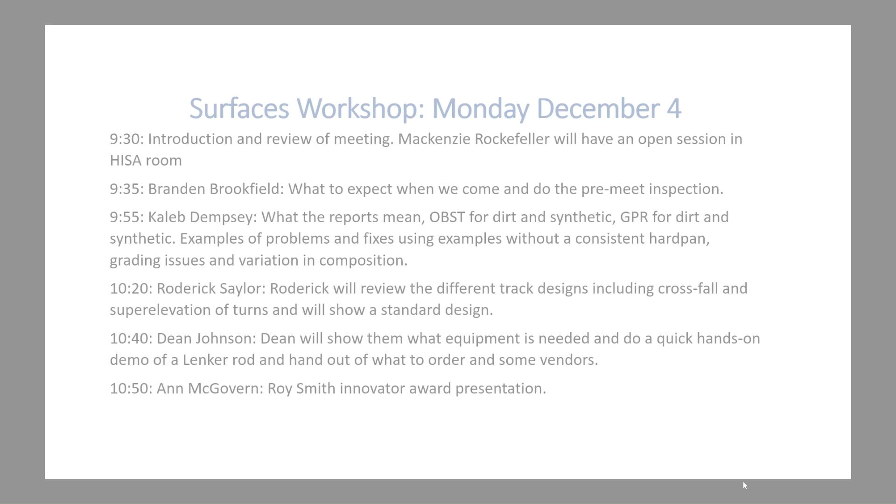Morning, everyone. As Mick said, my name is Branden Brookfield. I am the Onsite Testing Manager with Racing Surfaces Testing Laboratory. And today I am really going to go through what on-site testing includes and what that is going to look like when I show up on your racetrack.

So starting out, why does our on-site testing look like it does? A lot of what we have been doing, especially this last year, is pre-meet inspections. We are showing up, as Mick said, 2 to 4 weeks before your race meet starts, and we are going through and trying to fulfill each of these. So we are going to be looking at geometry of your track. We're going to be taking grades, looking at the slopes. We're going to be trying to figure out the accuracy of the distances. We can GPS mark your poles. We're looking at cushion and base geometries. We're taking those measurements at every 8th pole as we go around.

We're doing a base inspection. We are using ground penetrating radar to do that, where you are not having to take a large windrow out of your track to get down to your base and inspect it. We're looking at the mechanical properties of your racetrack using the Orono Biomechanical Surface Tester. The surface materials, we're going to collect some samples, take it back to the lab, and you'll get a report on that as well. And then we are also trying to fulfill these 2 bottom mandates here, the rail inspection and the track design records.

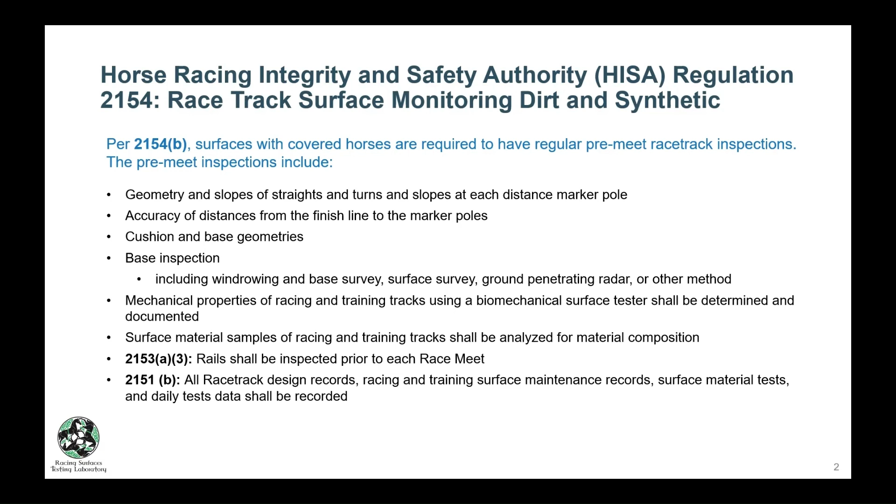And so this is all for the dirt and synthetic. For the turf, it's just slightly different. Mostly looking at the turf profile and turf species. We also want to take some samples there. And so then how are we fulfilling these requirements? As I said, we're using the Orono Biomechanical Surface Tester to look at the different properties of your racetrack, how it responds. That machine is going to be replicating the leading forelimb of a horse at a gallop. And so it is a standardized way for us to test across many different racetracks.

Again, the ground penetrating radar, where we can look into the layers of your track and not have to do anything really heavily invasive. The rail inspection, we're going around, we're walking the surfaces, making sure that everything's at a relatively standard height and that we don't have anything like we see here where there's gaps. And then we're doing the surface cross-falling grades as well as checking the marker poles, as you can see there in the far right.

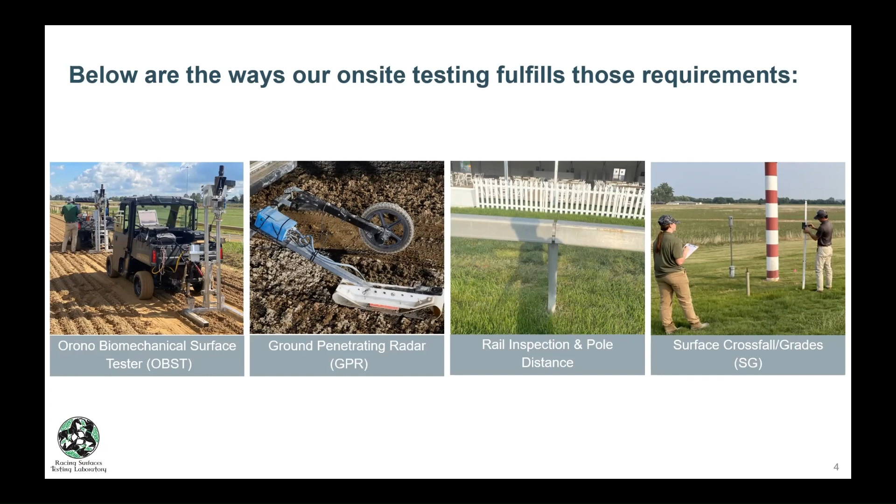So first things first, when we make it to your track, what do we need? We need a race-ready surface on your dirt or synthetic. And so what is a race-ready surface? A race-ready surface for us is going to be prepared as it would be for your first post. We don't want any changes. We want to make sure that you've really got all the hoof prints out if you've had morning training, and that everything is as set up and as perfect as it can possibly be. The biomechanical tester, we call it the OBST. It is fairly sensitive to changes. We're looking at variations of a 1/4 inch and seeing disparities with that. And so we really want to make sure everything's set up as best it can.

Also, we would really appreciate that we don't have a change in daily routine. If you change the depth on your harrows, you change the speed at which you're driving, you can start to create problems, which makes it not as accurate a representation of your track as you would probably like. And then we also need it to be classified as good. We can't test a sloppy surface. I don't think you guys would want us to test on your sloppy surface. It's just not going to give any good data.

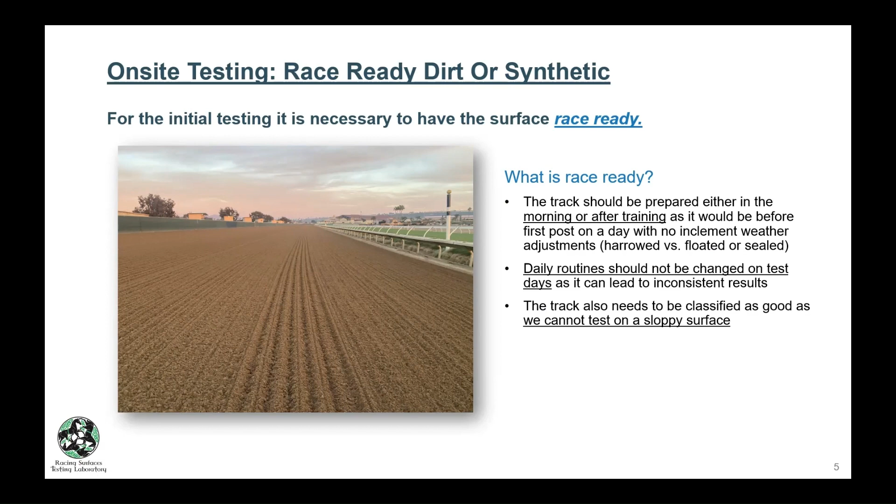And so to start out, we usually begin with the OBST. We are doing 3 drops at each 8th pole in the 7-foot and 15-foot lanes of your racetrack. You can kind of see that here - your blue is going to be your 7-foot drops, your white is going to be your 15-foot drops. It's 2 laps, and that'll take us roughly an hour to get done.

So why are we testing at these locations? It's going to accurately represent your racetrack for what most of your horses are going over - racing lanes. We want to be down there closer to the rail, and that's really what we're concerned about, when your horses are up at speed. Testing at 7 and 15 really makes sure we cover that. If you've got larger field sizes, 10, 12 horses running, you're obviously going to be out just a little bit farther than that 7-foot location. The 3 drops at each location really just allow us to look at variation both there at the pole and then variation over the entire track.

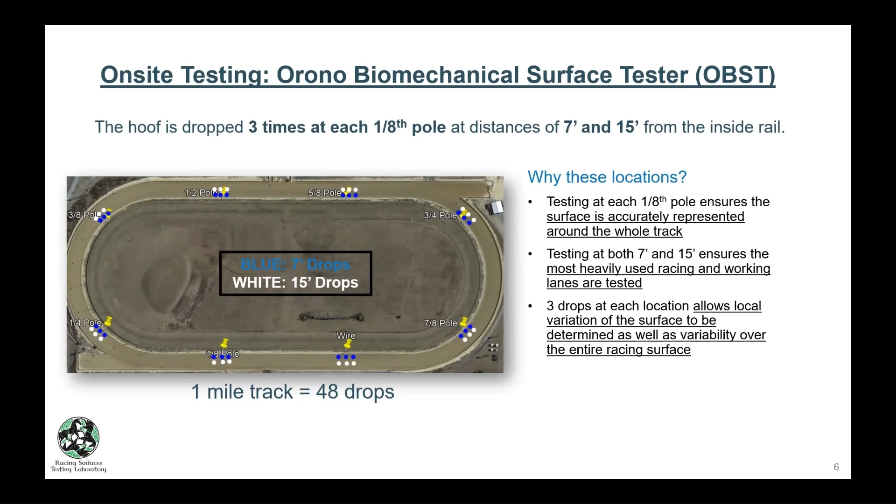So what information is our OBST producing? You're going to get 3 different measurements in your on-site testing report. You're going to have your cushioning, which is your vertical load. You're going to have your impact firmness, which is the deceleration, that's going to come to you in a G-force. And then you're going to have slide, which is your horizontal. All 3 of those will let you see how your poles stack up against other points locally and then across the racetrack.

And then for turf, we are actually going to use the penetrometer, which is a little different than the OBST, but a very similar concept of looking at the penetration depth.

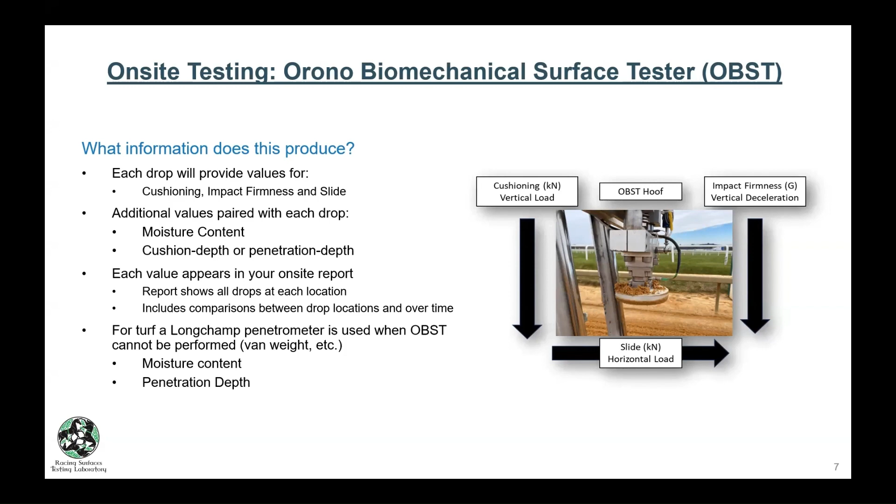So the next thing we're typically going to do is go to the ground penetrating radar, once we've finished with the hoof tester. For that, we'd prefer the surface be sealed in some capacity, whether it's with a roller or you float it down - it just makes that antenna bounce a little less. That's going to be the white piece there. The less that bounces, the better it's going to make your track look.

This is going to be able to see down - we can see your cushion layer, a pad layer, hard pan if you've got it, and we can see your base layers. And we can do all that without having to really disturb the surface, but having that nice, smooth ground to go over certainly helps us get that image better.

The best part we like about this is it allows us to take an extremely large amount of data in a relatively short amount of time. From us dialing it in to being done takes roughly an hour per surface, and we're taking a measurement every 4 inches around your racetrack as we drive, doing a total of 4 laps. That's obviously quite a bit of data points - a lot more than you could do taking hand measurements out there, and it's much more efficient.

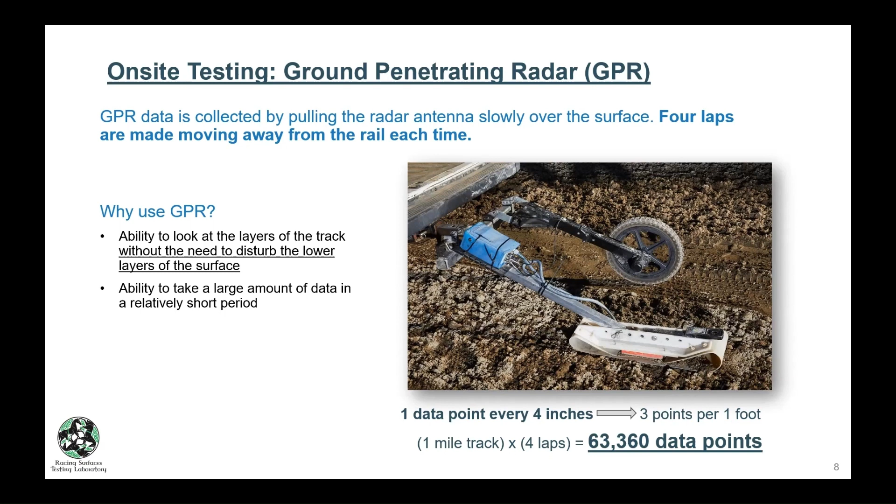So we're going through and looking at these layers, trying to see anomalies. If we see anomalies and things in there, we can notify you guys, and we actually have it with GPS data, so we can tell you exactly where on your racetrack that is. It's not a guessing game, it's not just 'okay, it's roughly at the 8th pole' - we can tell you fairly specifically where that's going to be on your racetrack.

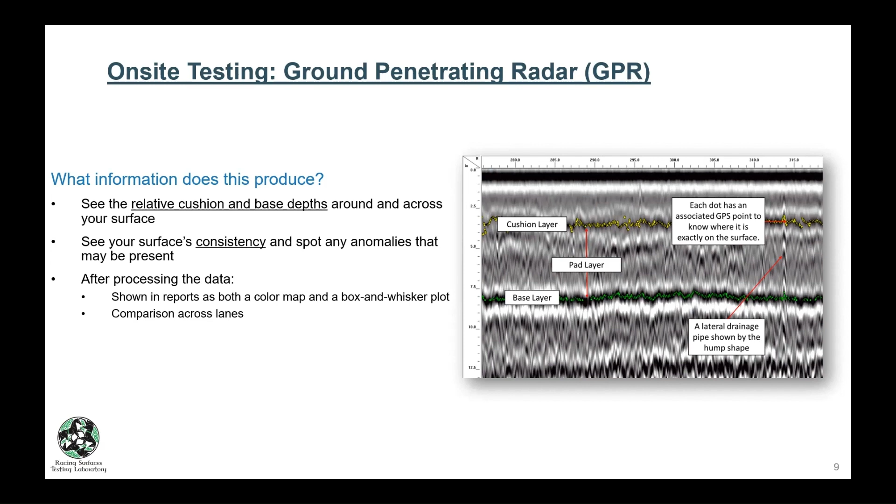So after we get done with that, this is the part where I like to say that you guys can really have your racetrack back. Normal maintenance can resume. I can dodge you and make sure I'm out of your way. I understand, I worked on crews at Keeneland, so I understand you guys have a lot to get done. In roughly 2.5 hours of testing, you guys can resume your normal maintenance and really get back at it. As you guys resume, I'm going to be taking grades.

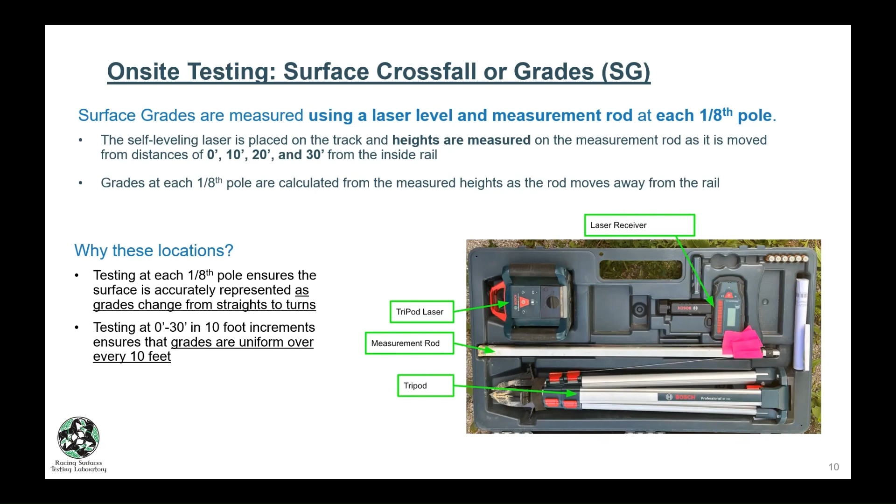We're going to check it at 0, 10, 20, and 30 so that we can see your grades as we go across the inside racing lanes. This is what you're going to get when we are all said and done. You'll have a very similar picture to that in your report. It allows us to determine your average slopes, look at standard deviations, and make sure that you're consistent around your surfaces. Obviously, that's our goal right now: consistency.

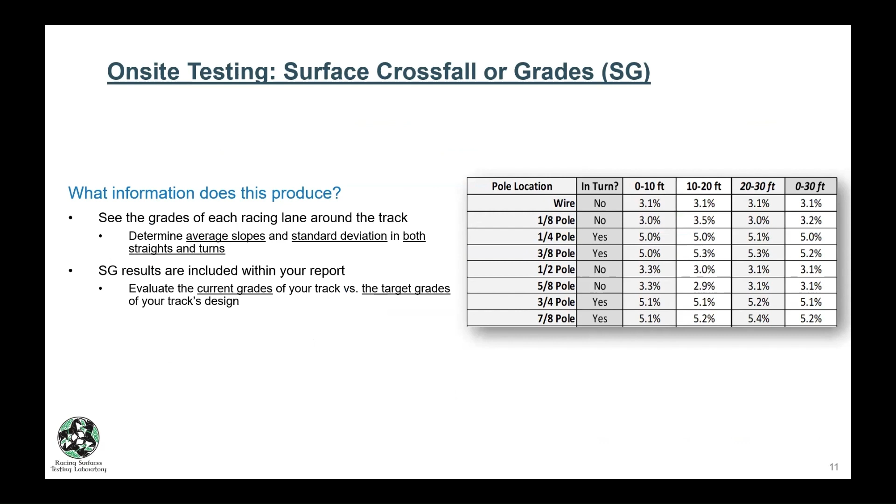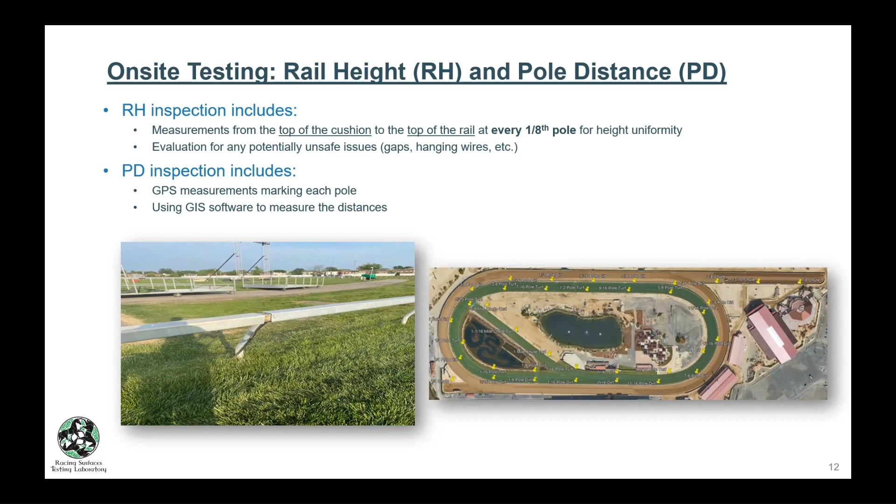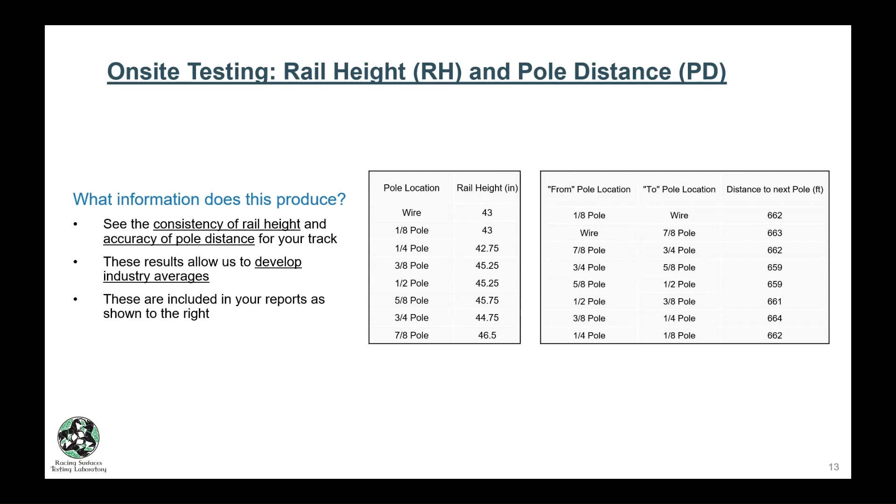After we get done with the grades, we're also taking samples as we're on site. Depending on your track, that's going to be dependent on how we take samples. For dirt, we are taking 7 standard samples for anything over a mile during on-site testing. If you are a training track, we're just generally hitting your quarter poles, generally a little bit smaller. You can get a much more accurate representation with fewer samples, just because of the smaller surface.

Synthetic, we're also doing quarter poles at 7. And then the turf, we're doing quarter poles at 3 and 28, as the rail tends to move for most properties.

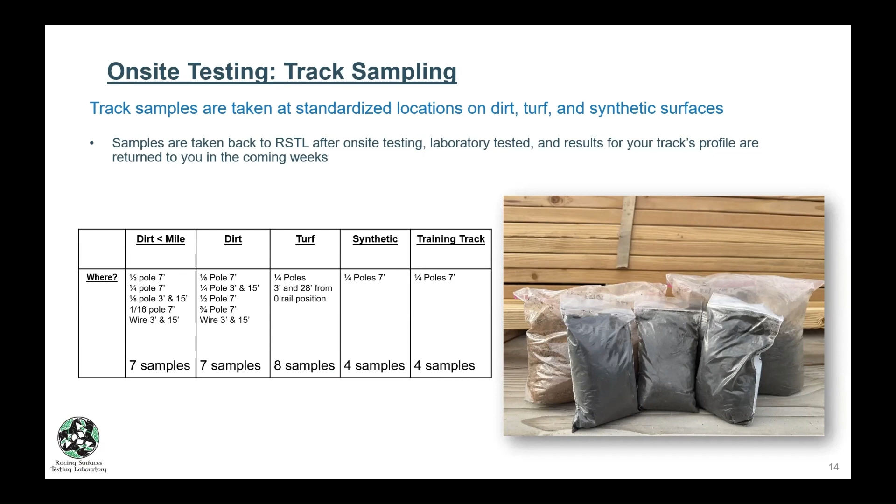So how are those results going to come back to you? That is going to be a report separate from on-site testing. When I make it back from my trips out to the lab, I'm handing those off to other people within our organization, Pat and Andrew, and they are looking at the sand, silt, and clay percentages of your racetrack and of that sample. The different samples that we take allow us to compare across your entire surface. If you have spots that are different or areas that are more affected by erosion, we're able to see those differences and then advise on how you guys can help them.

As I said, a huge factor affecting that is going to be drainage of your racetrack. If you've got large drains in an area or a place that continually likes to run off, most of the time that area is going to come back slightly different when we run the tests.

And these results are going to be provided in a composition report. That's going to be set out separate from the on-site testing report, but shouldn't be too long after we were on site.

The final thing that I'm going to do while I'm out there is check your weather stations if you guys have got one on your property. Really don't need anything from you all on that, and generally it's not on the track, so I'll be completely off your surface at that point. I'm going to be checking your rain gauges, making sure everything's on, and making sure you guys are receiving data so you can make decisions when you come in the morning. If we want to cut the track open, you can open it, see how much rain you got in the night past, and make that educated decision from that point.

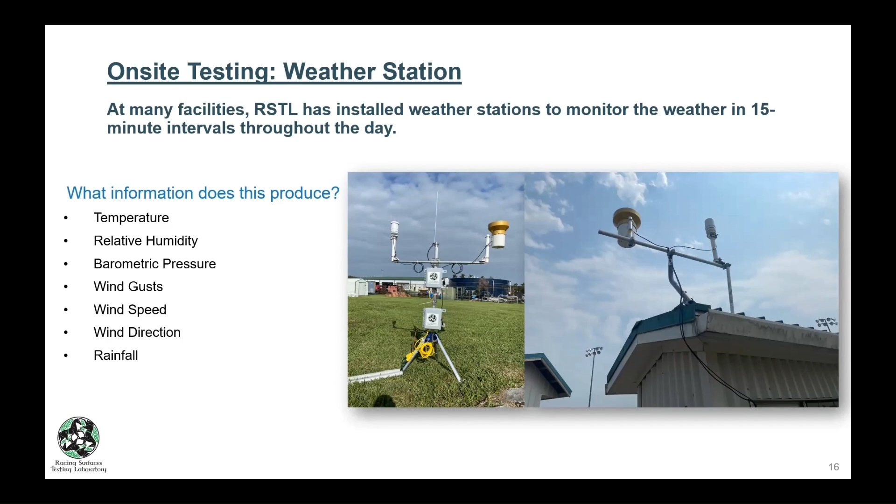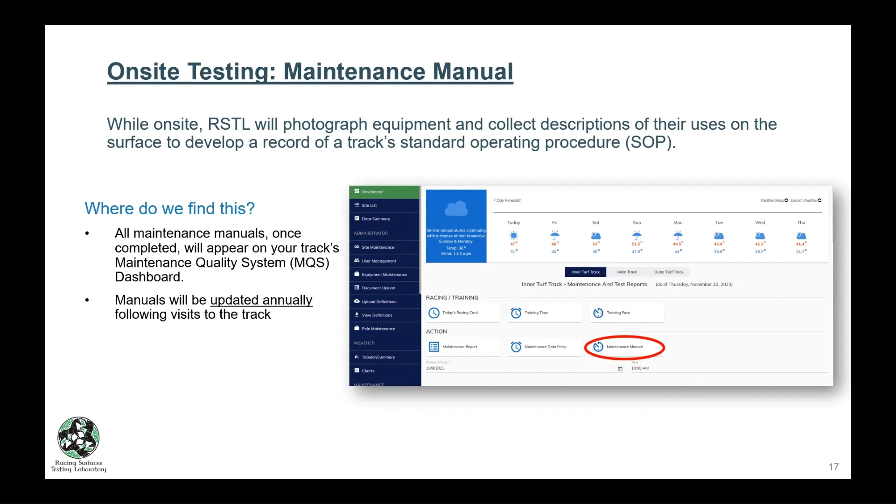Okay, the next thing I'm going to do is the maintenance manual. This is something I do when I get back to the lab. It's kind of a development of a standard operating procedure for your racetrack. The biggest thing we see is knowing where to find it, and this is just a snippet of the MQS page once you've logged in. As you can see, it's going to be right here on your homepage for maintenance manual. Once we have that completed, it will just appear here. It's not going to be sent out formally to you.

So then what kinds of things are we putting in your maintenance manual? Well, we're trying to figure out how you are taking care of your racetrack. So we want to know the equipment, the depths, the speeds, how you're running it, certain patterns. If you have a way you run your breaks, or a way you open the racetrack every day, those are all really helpful things for us to note.

And then you can see here at the top, this is what your maintenance manual is going to look like. It's going to have your equipment and what it is, how many you have, anything specific to your setup. The more information we can get, the more information we're going to provide back, as far as what you're doing daily with that equipment.

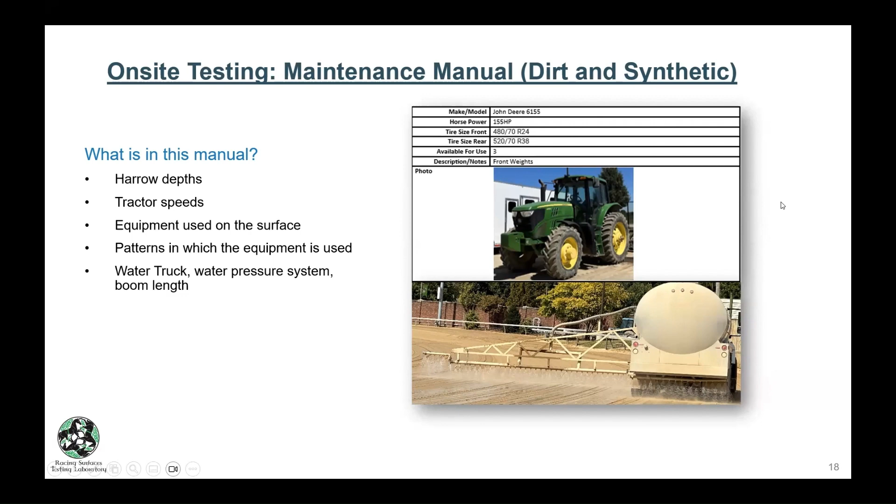We do this also for the turf. It will be included. For the turf, we're wanting to see if you have anything specific, as far as a turf tractor, aerators, vertidrain. If you have a specific spreader that you like to top dress with, those are all things that we want to include in your turf report.

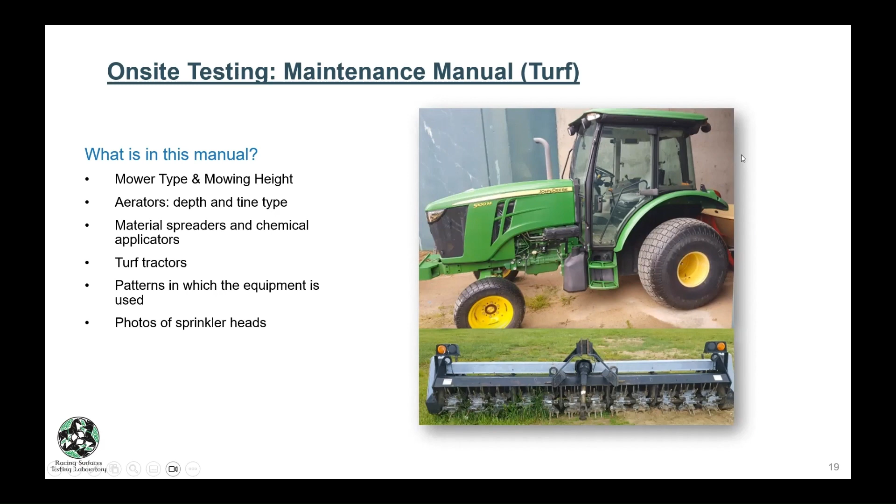Once we move on to sampling, grade, and rail inspection, you guys can completely have your track back. Whatever maintenance needs to be done can be done at that point. We'll make sure we stay out of your way. And then the final thing I'm doing while I'm there is checking your weather station, making sure that's cleaned out and that you guys are receiving all the data that's going to provide you.

And so then when are you going to get your results? That's probably the question you wonder the most once we leave. For the maintenance manual, as I said, it's going to appear on your MQS when we get that done. It's typically pretty close to when your on-site testing report is going to go out, and that report's going to go out in about 3 to 5 days.

The track sampling and composition results take a little bit longer usually. If I'm out and I have 3 tracks that I'm going to hit while I'm on the road, those samples don't actually make it to the lab until I make it back. So it's about a 7 to 10 day window on those samples.

And overall, that is what our day of on-site testing looks like. Do you guys have any questions?